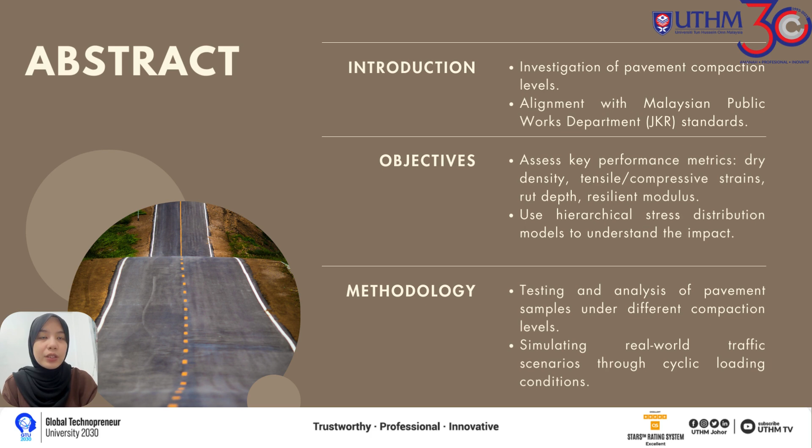We conducted rigorous testing and analysis on pavement samples subjected to various compaction levels. These samples were assessed for their ability to withstand stress and deformation under cyclic loading conditions, which simulate traffic loads. Our key findings show that higher compaction levels significantly improve dry density and structural capacity, effectively managing tensile and compressive strains and reducing pavement distress. Lower rut depth and higher resilient modulus values indicate better pavement performance.

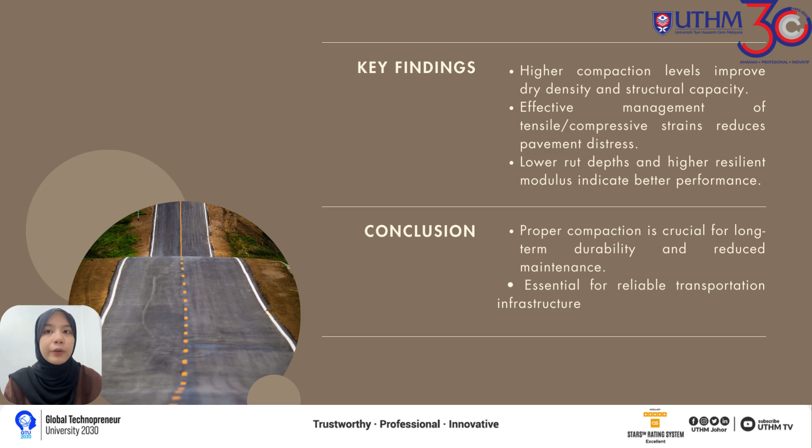In summary, proper compaction practices are crucial for ensuring long-term pavement durability, reducing maintenance need, and providing a reliable transportation infrastructure. Assalamualaikum warahmatullahi wabarakatuh. My name is Nur Shada and I'm going to present the introduction part.

The purpose of this study is to conduct a comprehensive evaluation of the structural condition of asphalt pavement using an advanced pavement software analysis supported by laboratory testing results. The study aims to identify and analyze common asphalt pavement distress which are indicative of underlying factors such as lack of structural capacity, inadequate design, and inferior material quality.

This project aims to leverage MATLAB for the detailed evaluation and analysis of asphalt pavement distress based on the laboratory testing results. By systematically assessing and categorizing distress types, quantifying their severity, and identifying contributing factors, the project seeks to provide a comprehensive understanding of the current structural condition of pavements under study, recommend targeted maintenance and rehabilitation strategies to optimize infrastructure investment and improve long-term pavement performance, and contribute valuable insight and empirical data to inform policy decisions, enhance infrastructure resilience, and support sustainable transportation development.

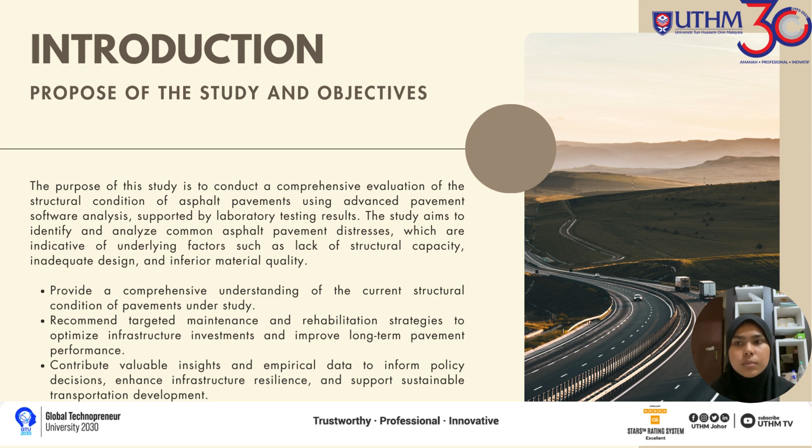In other words, proper compaction in road construction is crucial for several key reasons. For example, strength and stability: adequate compaction ensures that the layers of material in the road structure are densely packed. Next is uniformity and smoothness: effective compaction helps in achieving uniform density throughout the pavement layers.

Next is durability and longevity: well-compacted roads are more resistant to moisture infiltration and subsequent damage from freeze-thaw cycles. Next is optimized material usage: efficient compaction practices minimize voids within the pavement layers, optimizing the use of materials such as aggregate, asphalt, and stabilizing agents. Next is environmental benefits: proper compaction supports sustainable road construction practice by reducing the need for additional materials and lowering construction-related emissions.

Next, operational efficiency: roads that are well compacted experience fewer maintenance issues and disruptions. Then, compliance with standards and specifications: proper compaction ensures that the road construction meets design specifications and standards set by regulatory authorities. In conclusion, proper compaction in road construction is essential for building durable, safe, and cost-effective transportation infrastructure. It underpins the structural integrity, longevity, and environmental sustainability of roads, benefiting communities, economies, and the environment alike.

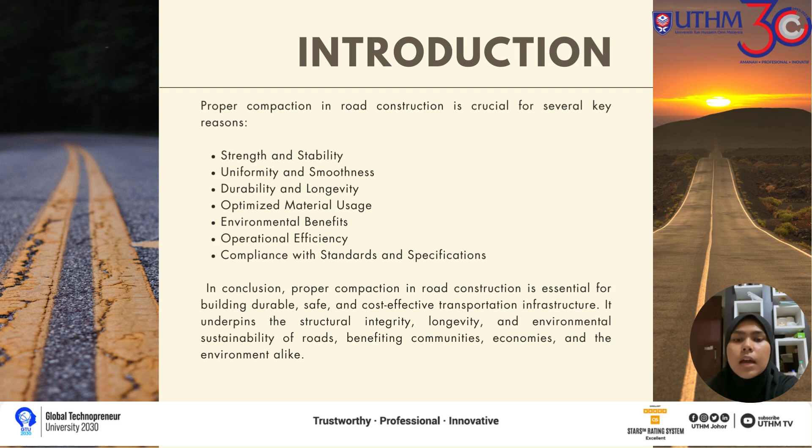Next is the standards and specifications referred to in the project. In conducting a study to evaluate the structural pavement condition and identify common asphalt pavement distress using MATLAB, it is essential to adhere to relevant standards and specifications. These standards provide guidelines for pavement design, material testing, and performance evaluation, ensuring consistency and quality in infrastructure management. This is the standard and specification, which is ASTM International Standards.

ASTM D5340, the Standard Test Method for Airport Pavement Condition Index Surveys. This standard outlines procedures for conducting pavement condition surveys to assess the condition of airport pavement, including distress identification and severity rating. Next is ASTM D6433, the Standard Practice for Roads and Parking Lots Pavement Condition Index Surveys.

Next is AASHTO Standards, which is AASHTO R30, standard practice for mixture conditioning of hot mix asphalt (HMA). Then AASHTO T283, standard method of test for resistance of compacted hot mix asphalt to moisture-induced damage.

Next is Federal Highway Administration (FHWA) guidelines: FHWA HIF-07-021, Pavement Distress Identification Manual. FHWA RD-03-031, user guidelines for waste and byproduct materials in pavement construction.

Next is Local and State Department of Transportation (DOT) specifications: local and state DOTs often have specific pavement design and evaluation standards that align with regional climate conditions, traffic characteristics, and environmental considerations. These specifications include material specifications, design standards, and performance specifications. Adhering to these standards and specifications ensures that the study of pavement distress evaluation using MATLAB is conducted systematically and reliably.

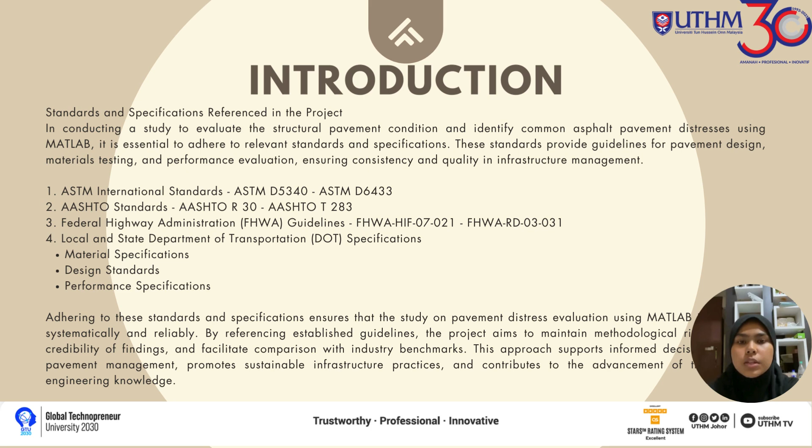The methodology section of our project outlines the systematic procedures and techniques used to conduct the study and achieve the research objectives. It serves as a blueprint for how the research was carried out, ensuring that the study can be replicated and validated by others.

This is our flowchart for our methodology. First we start, and then we do material preparation, which is to obtain crushed granite and sieve according to JKR. Then we do a compaction test, followed by repeated triaxial load test, and then we conduct the resilient modulus test. After all this, we do design analysis using MATLAB. Our group chose to use MATLAB as it was easy to conduct. That was the end of our methodology. Okay, that's all for me. Thank you.

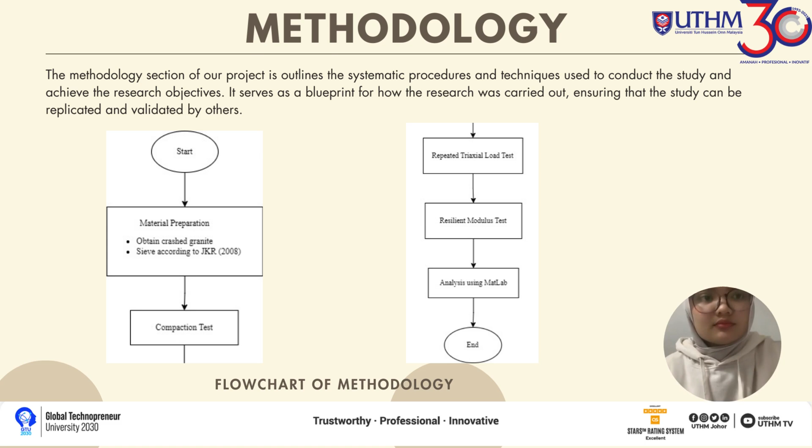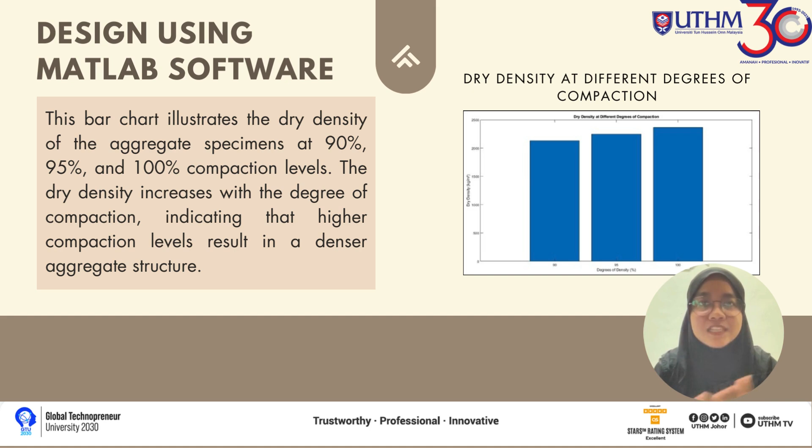So I will continue with the design using MATLAB software. First, dry density at different degrees of compaction. This bar chart illustrates the dry density of the aggregate specimens at 90, 95 and 100% compaction level. The dry density increases with the degree of compaction, indicating that higher compaction levels result in a denser aggregate structure.

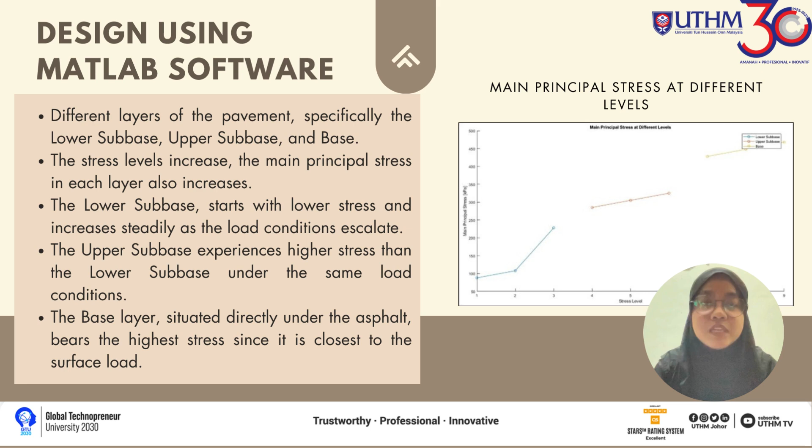Next, the upper subbase experiences higher stress than the lower subbase under the same load condition. The base layer, situated directly under the asphalt, bears the highest stress as it is closest to the surface load such as traffic. It must be the strongest layer to prevent pavement failure like cracking and rutting.

Next, cyclic axial stress at different levels. The line graph presents the cyclic axial stress for different pavement layers. It helps in understanding the cyclic loading effect and potential deformation patterns, showing how the amount of stress changes over time in various layers of pavement subjected to repetitive load. Each line represents a different layer within the pavement structure. The top layer experiences the most stress directly from traffic, while deeper layers encounter less stress. The graph shows how this stress varies over repeated cycles of vehicle loading.

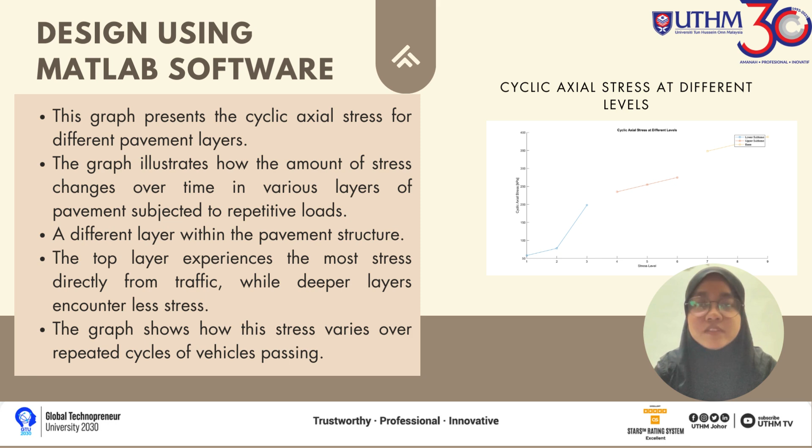Resilient modulus at different stress levels and compaction degrees. The graph shows how the resilient modulus, a measure of material stiffness, changes under different stress levels and degrees of compaction. Each line shows how the resilient modulus varies as the stress applied to the pavement increases. For instance, at higher stress levels, the resilient modulus tends to decrease, indicating the material becomes less stiff and more prone to deformation. Higher compaction level generally results in higher resilient modulus value, suggesting greater stiffness and better resistance to deformation.

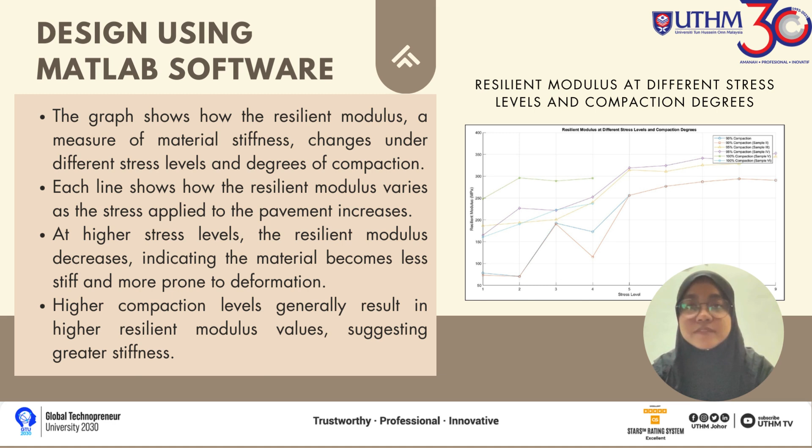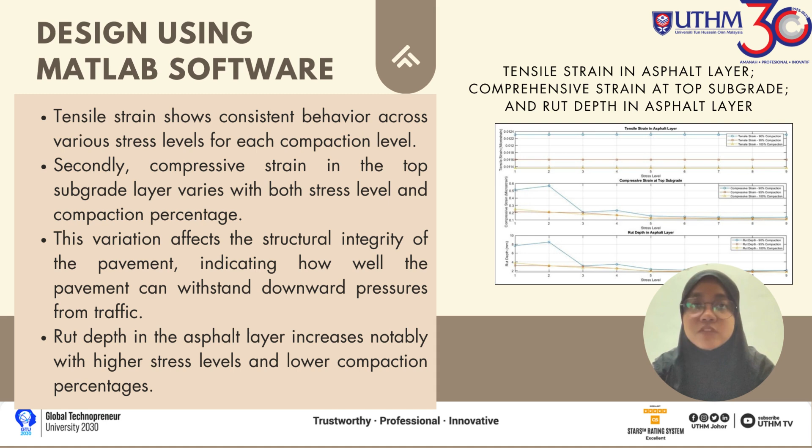Next, we have tensile strain in the asphalt layer, compressive strain at the top of the subgrade, and rut depth in the asphalt layer. Firstly, tensile strain, which measures how materials stretch under load, shows consistent behavior across various stress levels for each compaction level. This consistency highlights the predictable relationship between applied load and material stiffness. Secondly, compressive strain in the top subgrade layer varies with both stress level and compaction percentage. This variation affects the structural integrity of the pavement, indicating how well the pavement can withstand downward pressure from traffic. Lastly, rut depth in the asphalt layer increased notably with higher stress level and lower compaction percentage.

As for discussion, dry density increases with higher compaction levels. Higher compaction results in a denser aggregate structure according to standards like AASHTO. Optimal compaction is crucial for structural capacity. Higher dry density enhances load-bearing capacity and prevents structural failures such as cracking and rutting. Target compaction levels are specified, such as at least 95% of maximum dry density from proctor tests. Adequate compaction reduces void spaces, leading to a stronger pavement, a denser structure distributes stress more evenly, reducing deformation and maintaining smoothness.

Findings from Figure 1 align with existing standards, showing higher compaction increases dry density. Proper compaction is essential for strong, durable, and long-lasting pavements, reducing maintenance and ensuring reliable infrastructure.

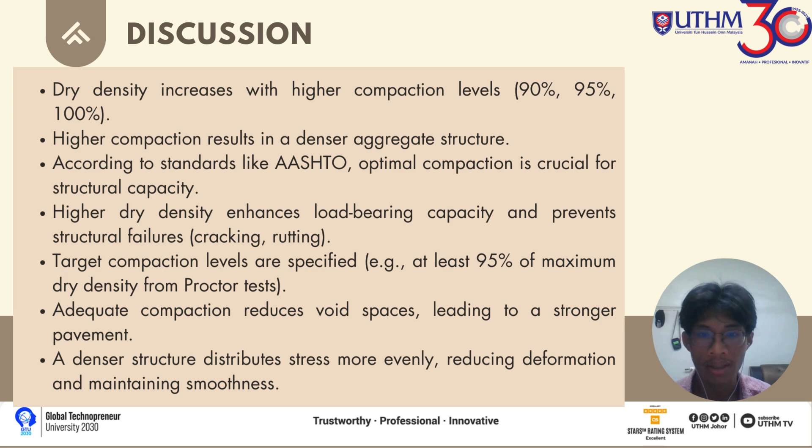From Figure 2, principal stress increases with high stress levels across the pavement. The lower subbase experiences the least stress, while the upper subbase and base layer experience progressively higher stress. This is crucial for effective load management within the pavement structure. Proper compaction ensures uniform stress distribution across layers, prevents localized failures, and maintains structural integrity.

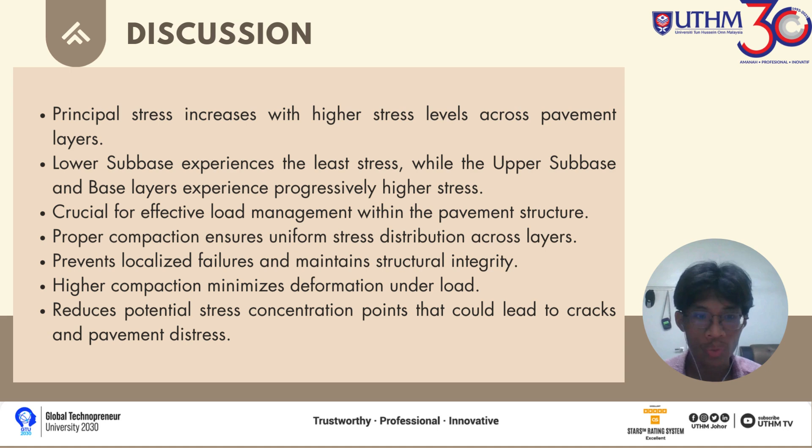Higher compaction minimizes deformation under load, reducing potential stress concentration points that could lead to cracks and pavement distress. Findings from Figure 2 align with Malaysian pavement design standards. Optimal compaction improves stress distribution, load-bearing capacity, and reduces failure, ensuring strong, durable, and long-lasting pavement capable of withstanding traffic and environmental conditions.

Discussion for Figure 3: stress varies over time across different pavement layers. Top layers experience the most stress, which decreases with depth, enhancing the ability of layers to withstand cyclic loading, reducing deformation, and prolonging pavement life.

The top layer must withstand the highest level of cyclic loading due to direct traffic contact. High compaction helps distribute traffic-induced stresses, reducing deformation and wear. JKR guidelines emphasize achieving optimal compaction for durability and performance under repeated traffic loads, and surface layers should be compacted to specified density using appropriate equipment and techniques.

Findings from Figure 3 show higher compaction enhances the ability to withstand cyclic axial stress. Adhering to these standards helps design pavement that effectively manages cyclic loading, minimizes deformation, and prolongs pavement life. Achieving optimal compaction across all layers is crucial for durable, high-performance roadways in Malaysia.

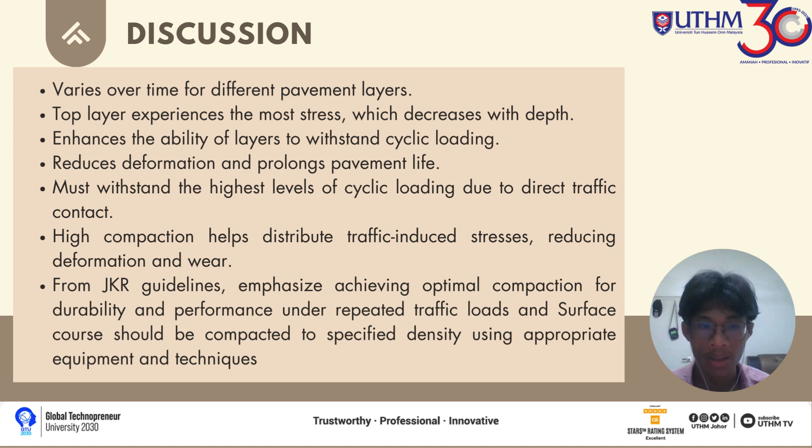Discussion for Figure 4: resilient modulus measures material stiffness. Higher compaction levels, which are 90%, 95%, and 100%, result in higher resilient modulus values, indicating greater stiffness and better resistance to deformation. At higher stress levels, resilient modulus decreases, showing the materials become less stiff and more prone to deformation.

This is critical for maintaining high material stiffness and resisting deformation under load. Higher resilient modulus indicates a stiffer material that can better resist deformation under traffic loads. As resilient modulus decreases, it indicates materials become less stiff and more prone to deformation.

From Malaysian pavement design standards, resilient modulus values are incorporated to ensure pavement structures can withstand applied load without excessive deformation. These values are used to assess the suitability of material for different pavement layers. Findings from Figure 4 align with standards emphasizing optimal compaction to enhance resilient modulus and maintain high material stiffness. Adhering to these standards ensures pavements resist deformation under load, ensuring durable and high-performance roadways. Guidelines provide detailed specifications for compaction levels and resilient modulus values for long-term durability and cost-effectiveness.

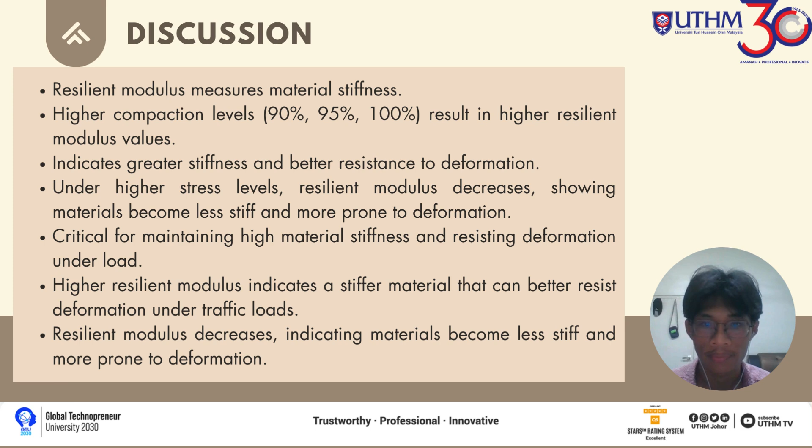Discussion for Figure 4 continued: tensile strains are consistent across stress levels for each compaction level, indicating a predictable load-material stiffness relationship. JKR guidelines specify limits to ensure long-term performance, which vary with stress levels and compaction percentage, influencing structural integrity control to prevent excessive deformation according to Malaysian standards.

Higher compaction reduces compressive strain, maintaining subgrade integrity. Strain increases with higher stress levels, and lower compaction indicates higher deformation risk. Higher compaction enhances stiffness, reducing rut depth, and improving load resistance.

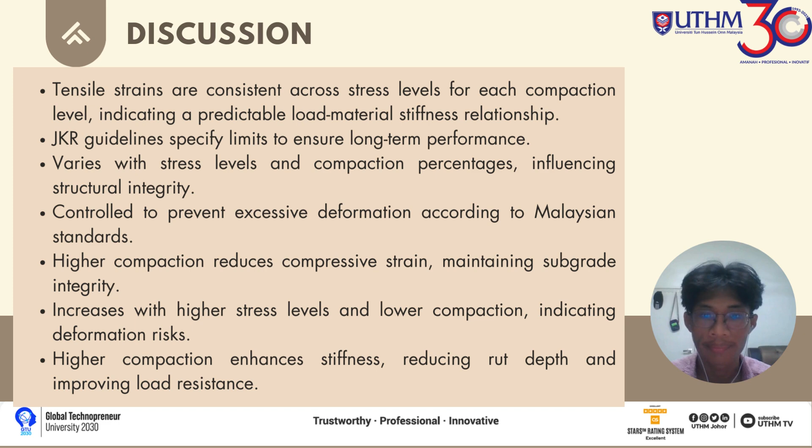From Figure 5, analysis shows that tensile strain occurs at the bottom, compressive strain at the top, at the subgrade, and rut depth overall. Findings align with Malaysian standards, highlighting the importance of proper compaction in controlling strains and minimizing rut depth for durable pavement. Design standards and JKR guidelines emphasize higher compaction levels to increase dry density, meeting structural capacity standards.

For hierarchical stress distribution, Figure 2 shows the stress distribution across pavement layers - lower subbase, upper subbase, base - aligning with Malaysian standards, ensuring different layers manage varying stress levels for structural integrity.

For mitigating cyclic loading effects, Figure 3 highlights the role of compaction in mitigating cyclic loading effects, aligned with Malaysian standards emphasizing high compaction for pavement resilience under repeated traffic loading.

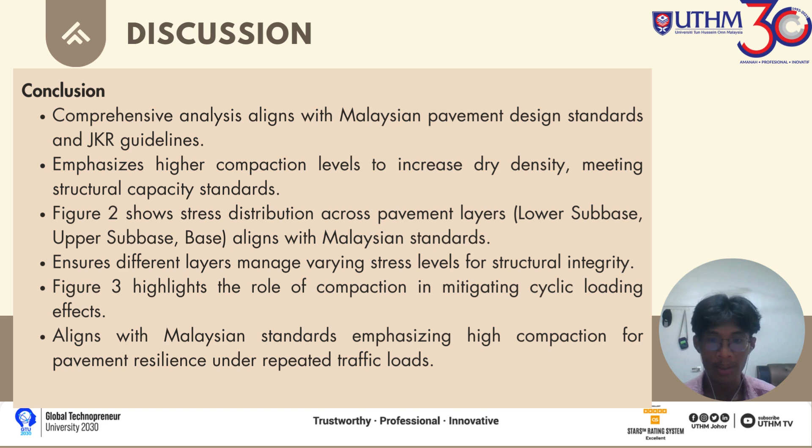For resilient modulus, Figure 4 findings reflect adherence to Malaysian criteria for stiffness, essential for withstanding traffic-induced stresses and maintaining pavement integrity.

Lastly, for the control of strains and rut depth, Figure 5 shows control of tensile and compressive strains and rut depth, supporting adherence to Malaysian guidelines for minimizing pavement distress and ensuring long-term durability through effective compaction practices.

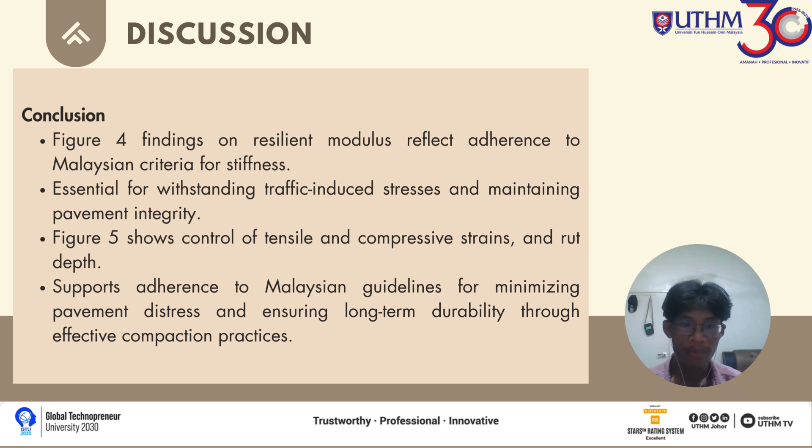For overall consistency with standards, the findings demonstrate consistent alignment with Malaysian pavement design standards, ensuring durable, high-performance roadways that meet stringent performance criteria and reduce maintenance needs.

In conclusion, our study highlights the importance of achieving higher compaction levels to enhance pavement performance and meet JKR standards. Proper compaction reduces tensile and compressive strains, minimizes rut depth, and improves resilience, resulting in longer lasting and smoother pavements.

The study emphasizes the need for rigorous quality control, advanced equipment, and thorough testing during the compaction process. By adhering to these standards, we can construct durable roadways that require less maintenance and support sustainable transportation networks. Ultimately, following JKR compaction standards is vital for creating safer and more efficient road infrastructure.